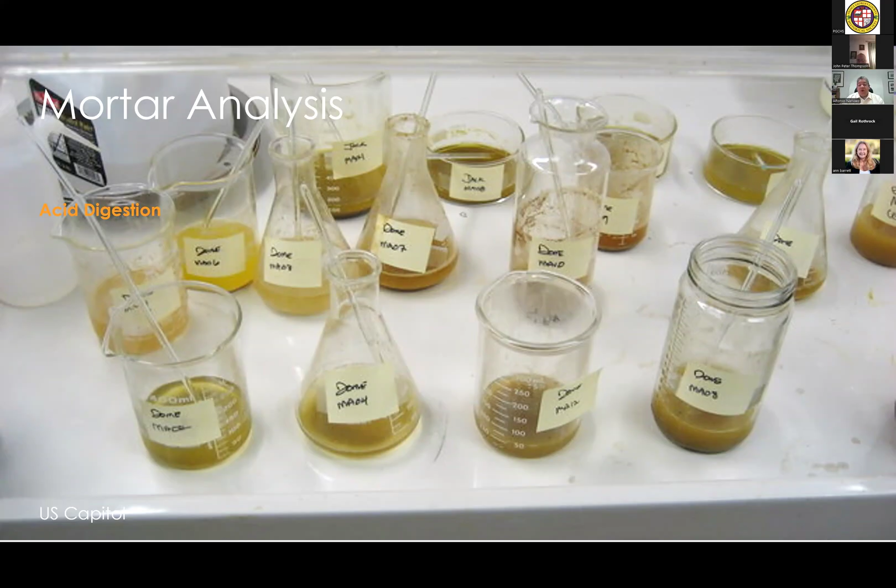We might go into more advanced analysis, which I wouldn't do in-house, I'll use a third party for that. That might include petrographic analysis, which helps me understand what the minerals and other constituents are in the mortar.

Alfonso, I promised I wasn't going to interrupt you. Why is it important to know the constituent parts of mortar, for example?

One of the fundamental things we're looking for is how do we match the existing mortar, both in appearance but also in its physical properties. We want to make sure the mortar, which is intended to be a sacrificial element, is softer and weaker than the masonry it's holding together. It's not important for the mortar to have enormous strength, it's important for it to do the job of holding the masonry units, whether brick or stone, together, and to prevent moisture from penetrating the joints between those blocks. But it's the masonry that's doing the work, the mortar is really there to tie it all together.

Over time, as we make lots of incremental repairs, we end up usually with a patchwork of different mortars from different generations. So part of what we try to do is find what's the original mortar, and can I afford to bring that back and make a consistent, uniform appearance. But the bottom line is it still has to work, it still has to keep the water out and keep the stones and bricks in position.

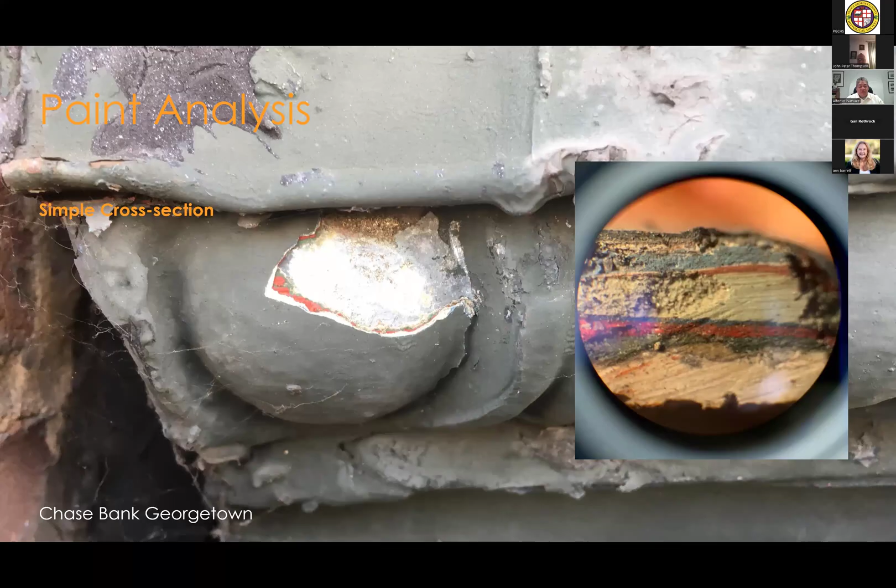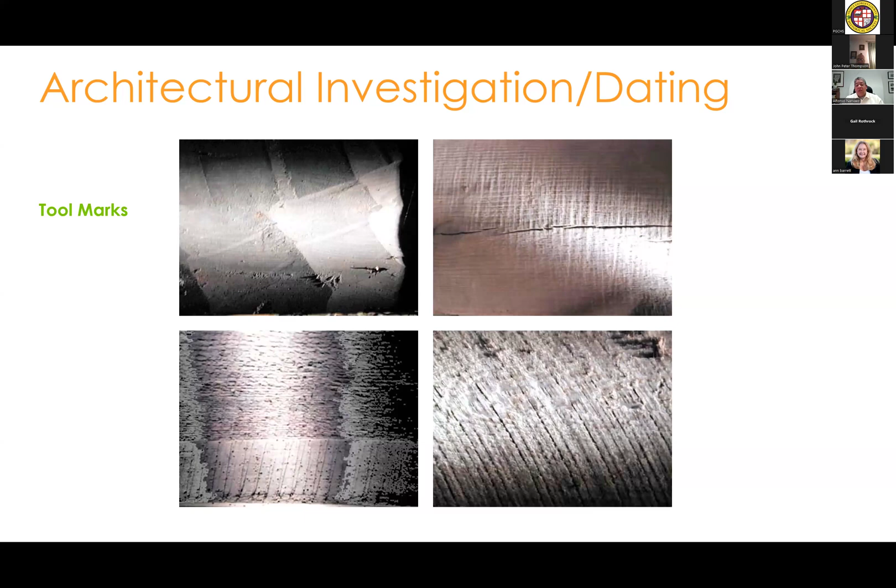When we get into treatment, I will often take samples of all the different materials and try to do test panels, saying okay, I'm going to use product X for a certain amount of time at a certain concentration, and then rinse it off. I'll follow the manufacturer's instructions as closely as I can, and then ask how well it will do if I cut it in half and make it much more dilute. Do I get the same amount of cleaning? Because what I want to do is the most gentle approach that still accomplishes my objective without over-cleaning. So we do a lot of testing of various procedures and materials in place, so we can write our specification with the most information possible.

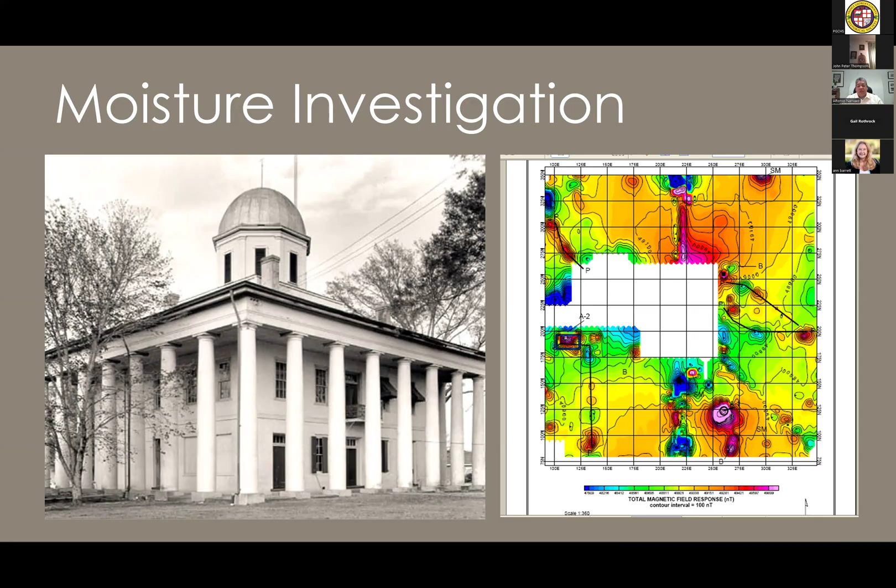On the right-hand side, we're looking at the ground around this particular courthouse to look for any kind of anomalies or water sources that might be penetrating the interior. We might use an electronic moisture meter that we're running up and down to figure out where is the changeover from wet to dry. And in this case, it's about 14 feet up the wall, which is exceedingly unusual.

So we try to figure out why. What's the underlying issue, and why is it misbehaving? Obviously, since this is an extreme example, something has changed, right? This is not the way a building normally responds. What has changed is that somewhere along the line, they put a Portland cement plaster on the outside and a Portland cement plaster on the inside. That's trapped all the water inside this 1840 brickwork, and it has nowhere to go. It's still looking for a place to evaporate, so it's just going to keep climbing up until it finds a place where it can get out. That's what we're trying to figure out, the whys.

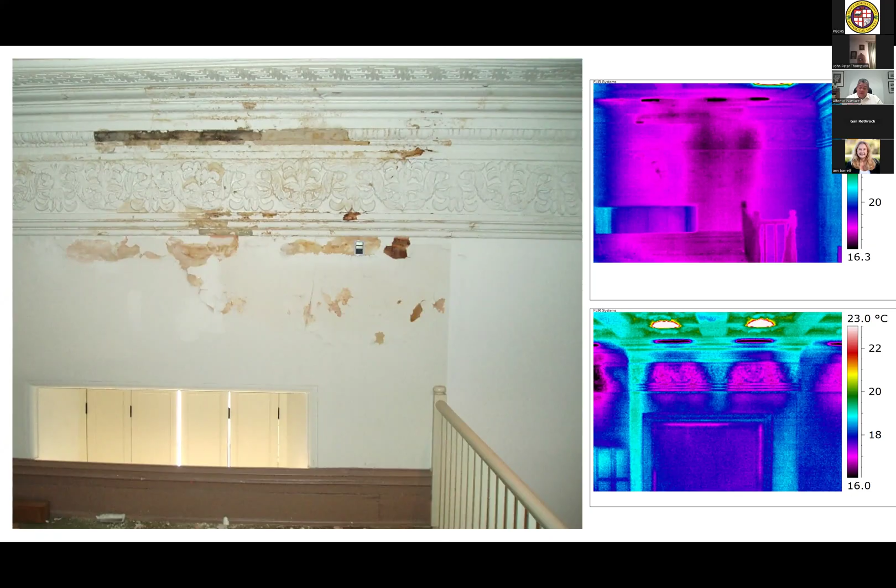Here's another way of looking at moisture. Again, visual clues on the left-hand side. On the right-hand side, we're using thermal imaging, which shows me where the moisture is in the wall as a function of temperature. The reason it shows me that is that a wet wall is denser than a dry wall, so it will gain or release heat energy faster. The dry wall will release it slower, and so I'll start to see a difference between the wet and the dry areas. It just gives me more information to try and understand what's going on and why.

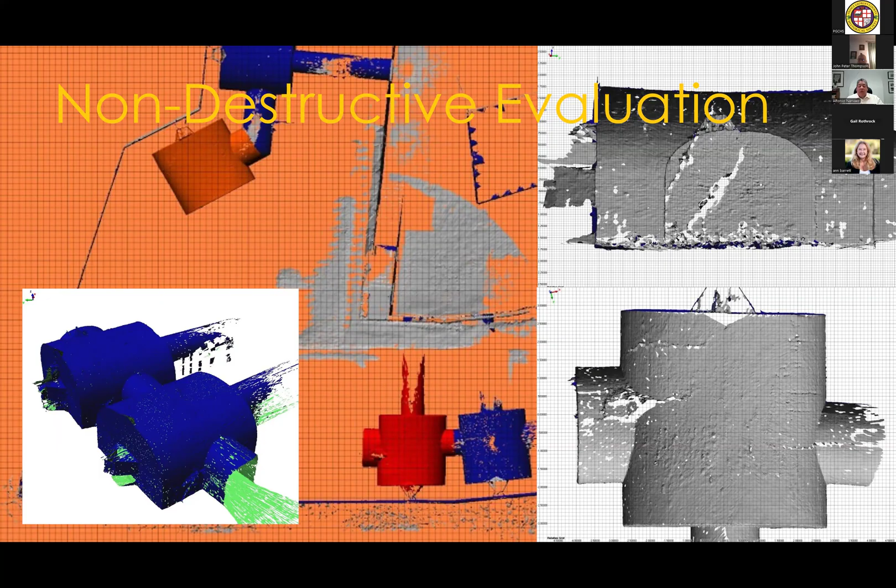Now, three-quarters of the way through our investigation, Hurricane Katrina came through and caused all kinds of damage. So then we got involved in evaluating what the change was from pre-Katrina to post-Katrina, in an effort to try and help Fort Pike navigate FEMA and trying to get money to do some of the reconstruction, but also look at the things that happened to the building over time, and how we could solve that, how we could help save the site and make it once again be open to the public.

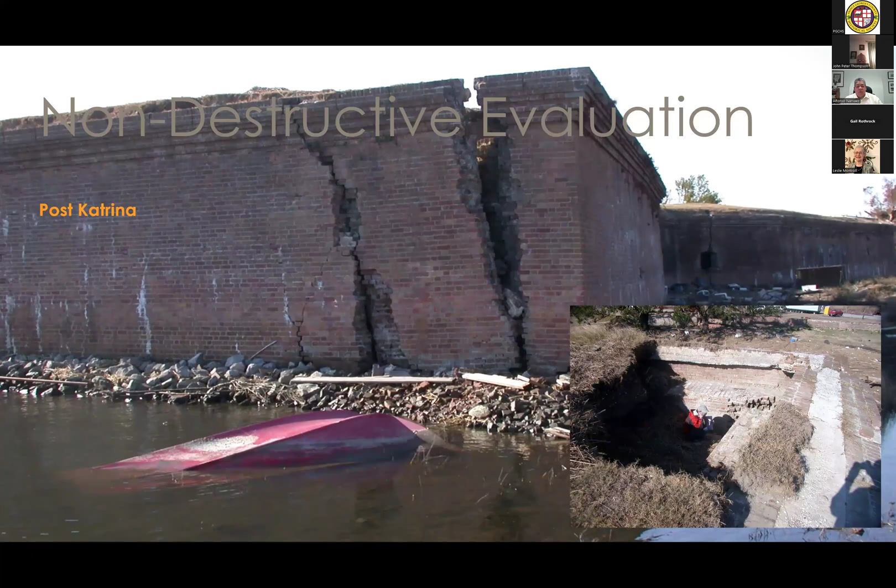This is in Plaquemines Parish. This is Fort Jackson, which also got hit by Hurricane Katrina. I looked at about 4 or 5 historic forts in Louisiana. This is after the waters went over the levee at Fort Jackson. The water stayed pretty much at the top, and it went down to about the halfway level, and then stayed there for 6 weeks. So we ended up with this sort of bathtub ring of salt around the entire fort. And then that salt then started to contribute to damage to the masonry and loss of mortar.

So again, trying to encourage FEMA to do the right thing, but it turns out that FEMA has certain four-letter words that it doesn't like to deal with, one of which is silt, salt, tree, or anything else they can come up with a four-letter word, they won't fund. So we spent years trying to help Fort Jackson recover some of the funds that they needed in order to come back from Hurricane Katrina damage.

Here's my business partner, this is Lane Burrett. Here we're looking at some of the mortar that's washed out of the wall. We're in a boat in the moat going around the outside of the fort and looking at the surface of the masonry, trying to figure out what's going on.

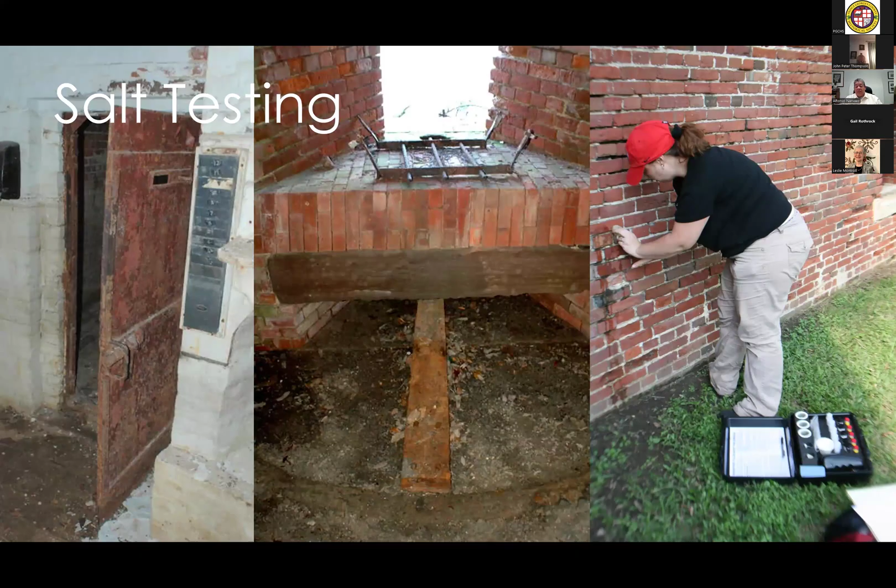The salt also affected everything made of metal inside the building, so we did a comprehensive investigation of every metal feature to look for active chloride corrosion cells that were going to accelerate the loss. A lot of this stuff had surface rust, but it was stable. What happened with Katrina is that it destabilized everything and caused it to rust much more aggressively, resulting in loss of fabric. Rust, though, is also a four-letter word.

The other area we get involved in is architectural support. This is where we might be working with or for an architecture firm, and we will do investigations, often test panels and things like that, which lead to a full-blown project. Sometimes we manage that project exclusively within the conservation group, or sometimes we work with architects and the architectural team to execute the larger project, depending on the scope.

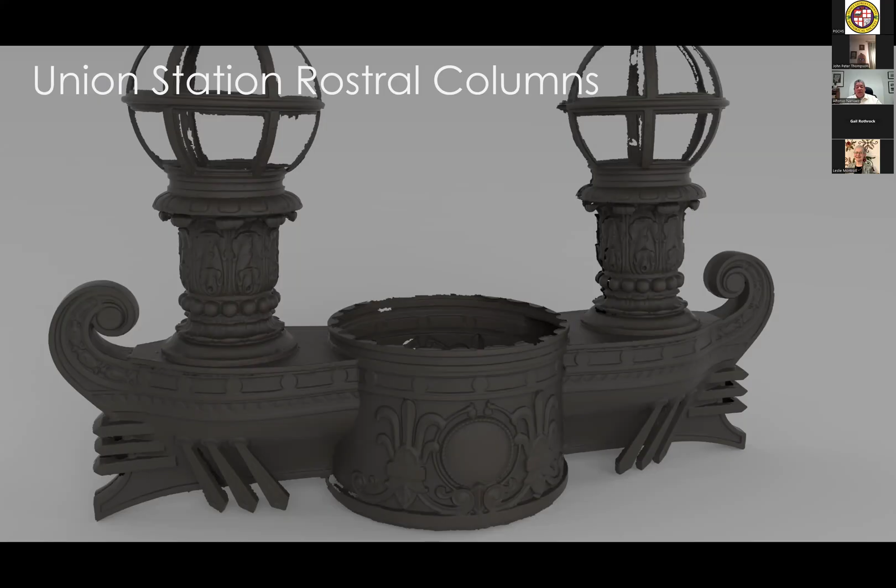More recently, when we started Eon, we wanted to focus on the construction trades and the contractor. That's because that's where preservation, we could have all the beautiful plans and notions and ideas at the front end, but it can all fall to pieces when the contractor gets involved. So we tried very hard to say, how do I support the contractor in their endeavors so that they can navigate between the architect and the contractor and the owner?

I call that little area between the architect and the contractor the Bermuda Triangle, and that's where all projects die, in that little triangle. That's where change orders come. That's where risk is. That's where there's so many unknowns. So we try to own that triangle as much as possible. We call it bridging the gap.

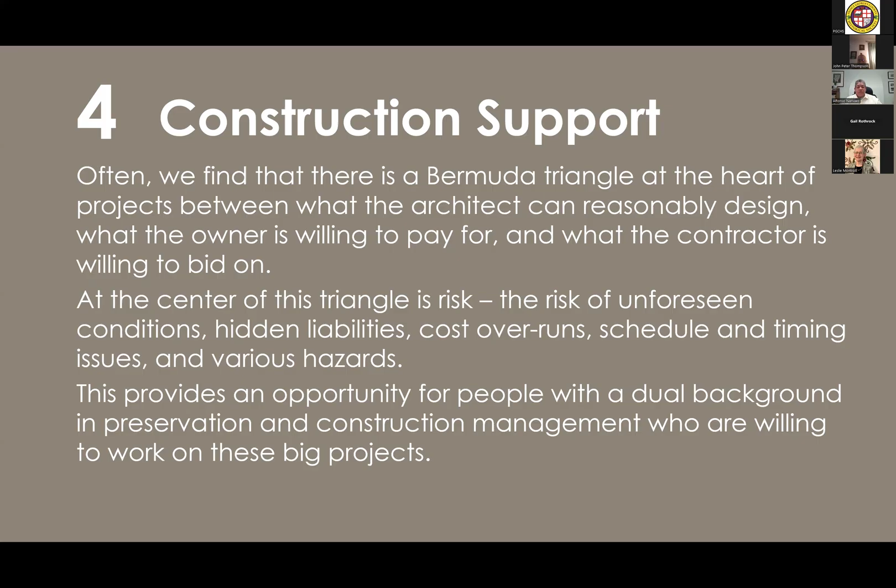So what we ended up doing was a lot of projects where we were brought in by the contractor, both to help them understand the project, but also to navigate. Because we speak owner and we speak architect and we speak contractor, we often serve that role of translating what's possible, and also translating what the construction documents actually say versus what the contractor is actually supposed to do.

So we end up, on occasion, hired by both sides, which is a very unusual situation to be put into. For that reason, I always tell everybody that hires us that for all intents and purposes, we consider the building to be my client, as opposed to you, the contractor, or you, the owner. Everybody here is just a temporary blip in the lifetime of this building. So we're going to try and do what's best for the building.

In this case, this is the Miami Freedom Tower. This is owned by Miami-Dade College. It was built as the Miami News Building back in 1925.

And the contractor was given a set of construction documents that basically had a big cloud around the tower, with instructions that the contractor was to hire a conservator to survey the complete outside once access was available, and to determine the scope and to do that scope within the time and budget allotted, which of course is called kicking the can down the road.

So the contractor did a search, we came to an understanding, and flew down to Miami. Then we did a very comprehensive but rapid investigation of the building envelope via swing stage, via fixed scaffolding, via man lift, and via crane bucket. So you can't be afraid of heights. Another requirement.

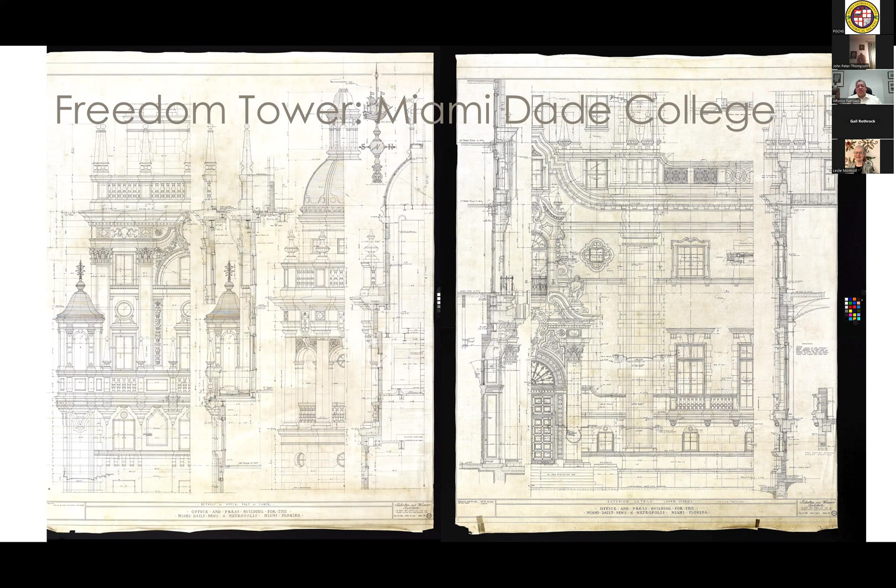These drawings are hard to get a sense of scale, but they're about 4 feet wide and 5 feet tall on 2 sheets. It maps out every piece of ornament on the facade of the building and its attachments. For me, this is gold—this is my roadmap for all of the different issues I am going to find on this building.

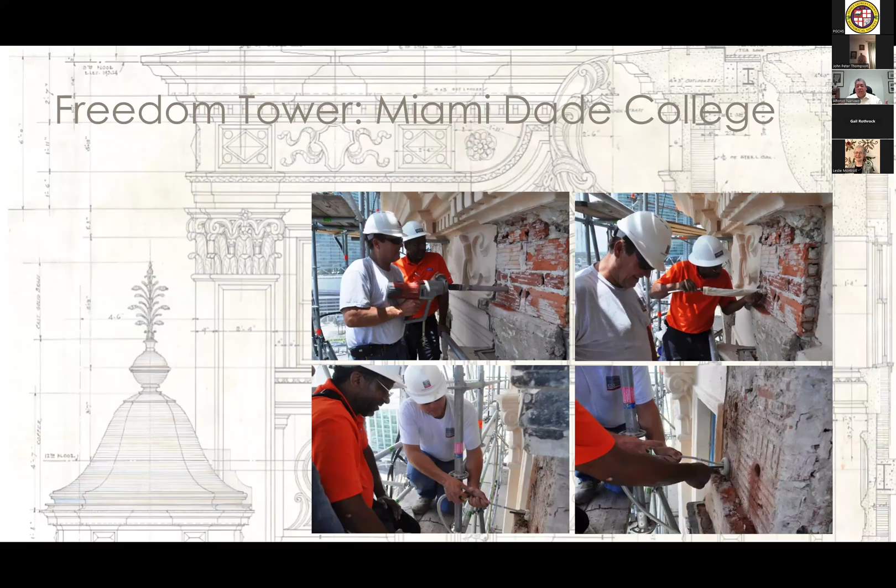We also helped train them in techniques that are not common in the Miami trade, in the contracting community. Here we're using what's called a Cintec anchor, and we brought down the manufacturer to train the contractor on how to use this very specialized anchor to tie the wall together. I won't go into a lot of detail, but that's the kind of thing we might get involved in.

But again, we're in the business of translation. Here's some of the detailed areas—we ended up mapping out a tremendous amount of work on this particular building. That was one of the ways we did quality control, to make sure things were being done properly and staying on top of all the various issues. We flew down once a week to assist the contractor, and for all intents and purposes the architects, the building owner, and the contractor were all happy with that arrangement.

This was another project we were involved in—the U.S. Capitol Dome renovation, from a few years ago. Here our role was we wore several different hats. One was to communicate to all of the subcontractors the importance of this site and of historic preservation, and the limitations they might encounter, such as not being able to introduce moisture or outside air into the interior. We have this incredible array of artwork on the inside, from the apotheosis at the very top, to the frieze at the midway point, to sculptures down at the ground level. Part of that was to communicate to the contractors what the dealio was.

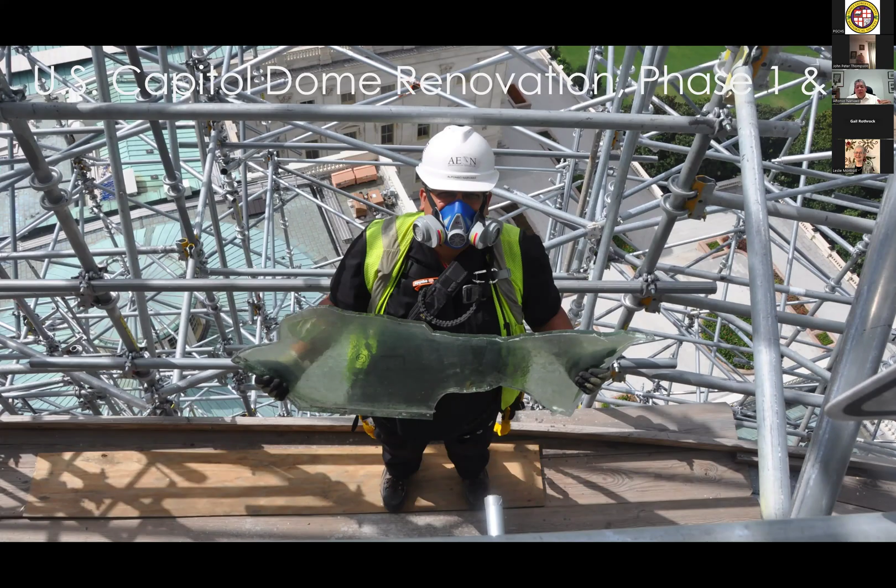Then we worked with a company in Oregon to cast new sheets of glass. They do all kinds of fancy high-end glass, and they created a custom steel platen—the table it's coming out on—which was preheated to 500 degrees. The molten glass was heated in a big kiln and chemically made to be as close to the original glass as possible.

They would take giant ladles, and carefully, because it's 2,000 degrees, bring that ladle of glass over as fast as possible and pour it into this machine, which is like a big pasta roller. Where that 2,000-degree glass hit the 500-degree temperature, it developed a series of chill marks, which you can see in the glass surface.

Those chill marks are very similar to the ones we had in the historic glass. But we made the new glass half as thick so that we could take two pieces and laminate them together, creating laminated glass that was as close as possible to the visual appearance of the historic glass, but is now essentially safety glass.

That was installed over the stairway that the tourists run. They waited too long to do the project, so we only installed 7 or 8 pieces of glass, and they have another 10 pieces in storage waiting to be installed at some point in the future when they decide to re-scaffold the Capitol Dome.

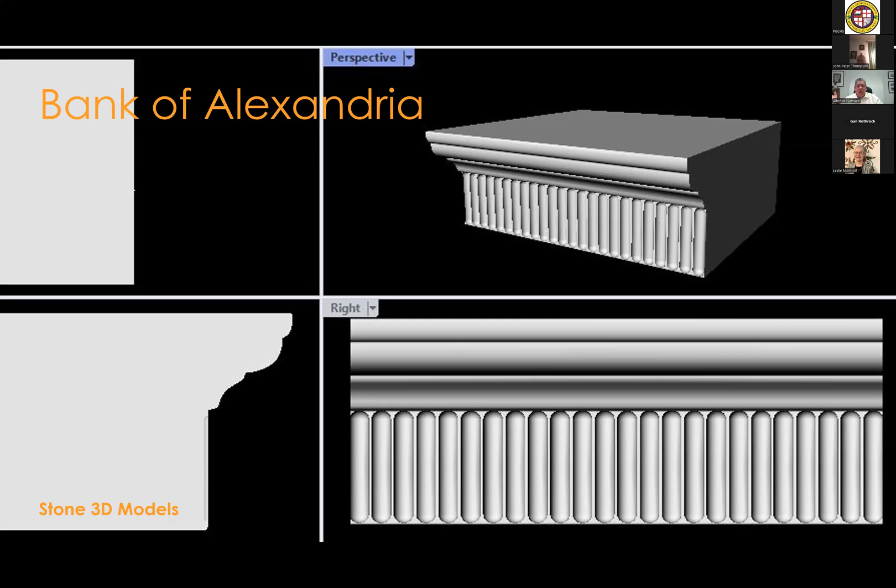That computer model was then used to create new stone models—3D models for each and every piece—which allowed us to work with a stone cutting company in Indiana to make new stone elements. On the right here, you see restored, reconstructed, fabricated new.

This is... forget the name of the stone. Anyway, it's new limestone that has the same color but doesn't have the unfortunate property of dissolving in water. So that whole cornice section was replaced.

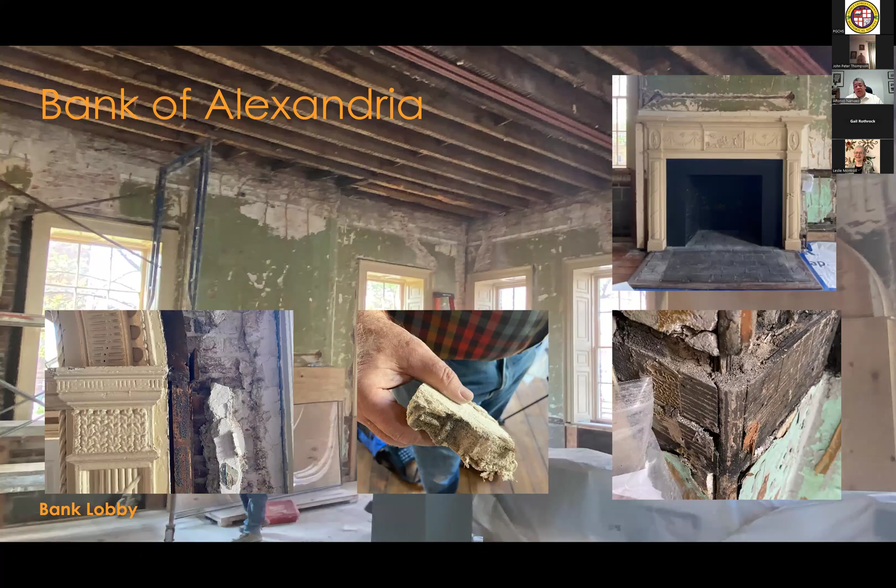We also got involved in evaluating the original banking hall. There we took away all the modern construction to expose as many of the original features as possible, and worked with a whole team of historic architects, conservators, and specialists evaluating all the physical evidence of how that banking hall appeared historically, including evaluating each of the mantelpieces and carefully removing paint to expose areas where we were missing compo ornament or where we had different colors. That's another type of project we might get involved in.

And then finally, we're involved in what we call technical preservation services, which is, for all intents and purposes, design-build work on projects. That means we can be a full service firm, starting from the first investigation all the way through implementation. So here we were contacted about...

This is a sculpture on the White House grounds of William Tecumseh Sherman. In the course of doing the work, a contractor said the surface has turned yellow, we don't know what to do. Just on the phone I said, you probably have a coating on the surface. They said no, there's no coating. I said, yes, there's a coating.

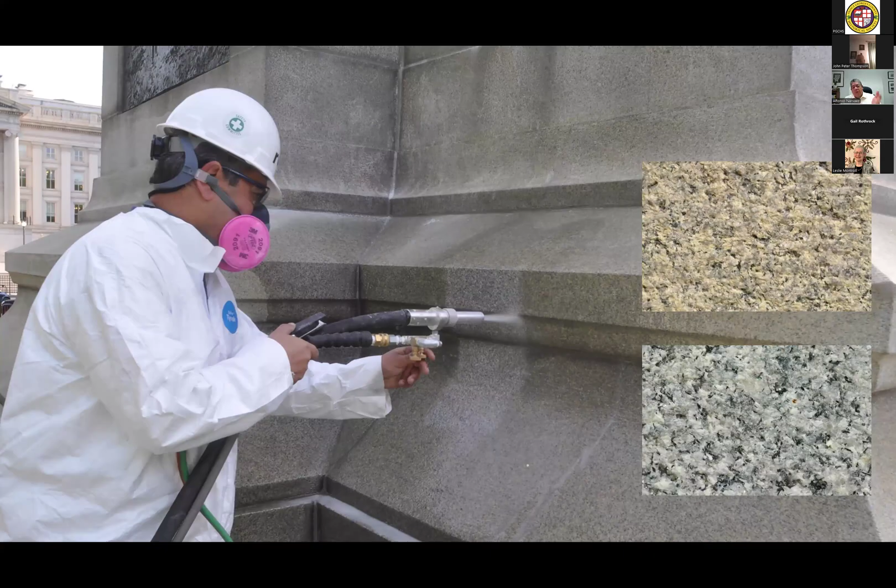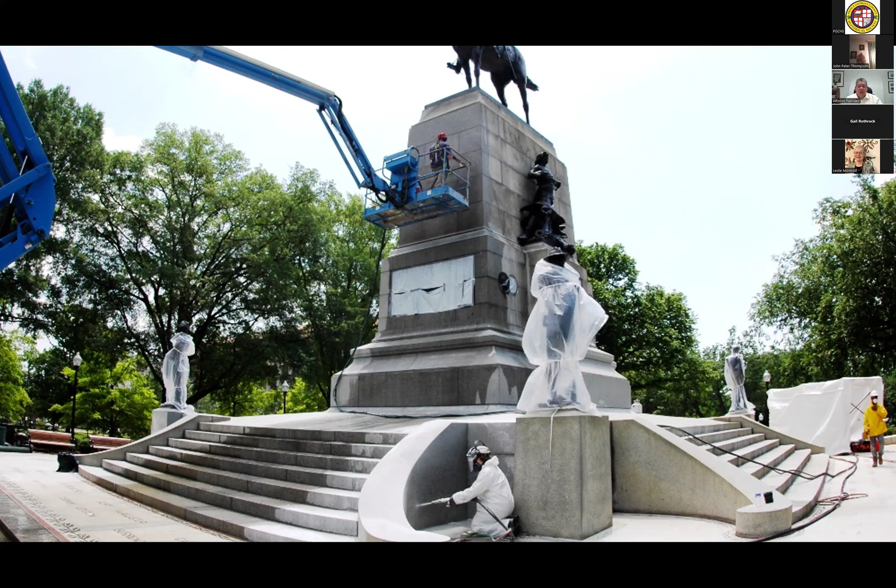So we went out there and helped remove the coating using a microabrasive technique, using the Joss Rotec system, which uses microfine crushed glass media, like talcum powder when you feel it, and very low pressure—25 psi. That allows the glass, which is stronger than the coating but weaker than the stone, to remove the coating. You can see the before and after between the two sections there. We basically went over the whole thing with that system, cleaned the monument, protecting all the bronze elements, doing some other repairs, and here's the end product—a lot less yellow.

Here's another monument, also at the Naval Academy. This was a project done by a class gift. We had to deal with four different elements: an 1812 wooden figurehead encased in fiberglass on top, a 1920s concrete base, 1920s bronze plaques, and 1797-era cannon—actually merchant cannon, not from the HMS Macedonian, but the right size, so that's what they used—that have active corrosion going on. So we had all these disparate elements. Our mission was to take it all apart, restore all the different elements, and put it all back together again.

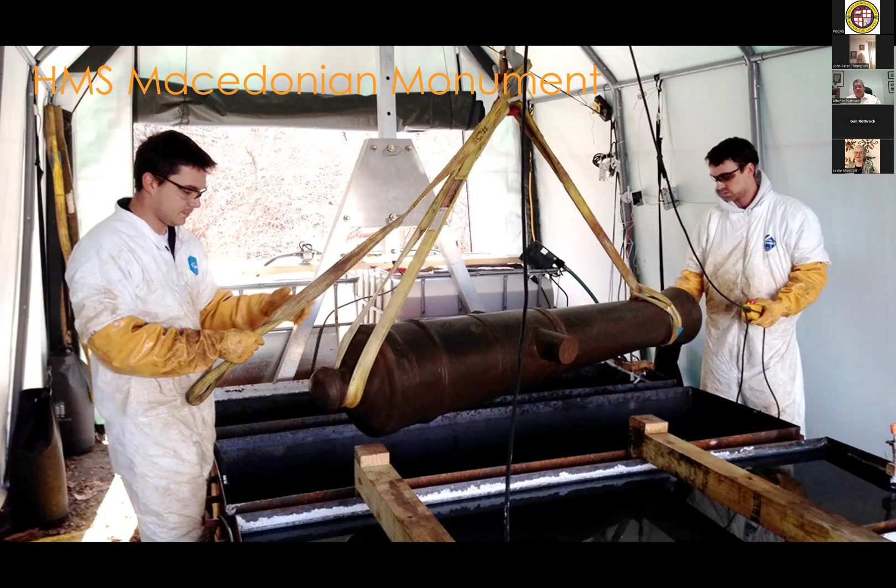And then they were put into a bath, which allowed me to do a chemical chloride extraction from the metal. This took about 3 months of being in a bath, and we had to monitor the water and change out the water and the chemicals to encourage the chloride cells to be evacuated. You can see the outlines of the cannons and the bubbles on the surface.

Here we are doing some other treatment. These are for different cannons, not the same cannons. And then everything gets put back together again. So we restored all the concrete, restored the bronze plaques, recreated the figurehead, and restored the cannons and put it all back together again. And of course, it's about ready for work again now.

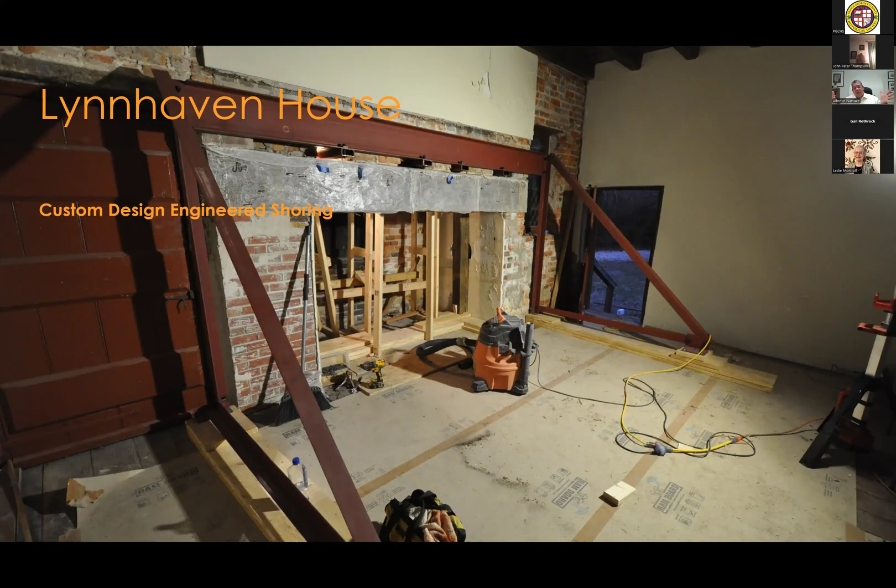So we worked with our engineers and our team to come up with a scheme for how we were going to treat it. So here we brought in a custom-made portable rig to carry the load so we could take out the lintel. The lintel itself has been wrapped in rice paper and a very weak adhesive. And then that allowed us to pull out the lintel.

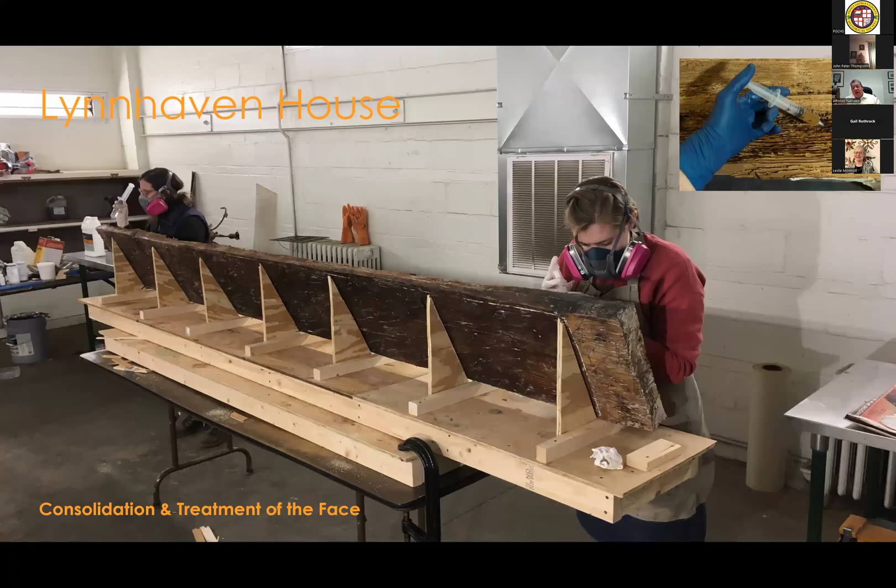The lintel, of course, was very badly damaged, but we wanted to retain the original appearance. So we took it back to the lab - not my lab, somebody else's lab. We cut off the outer 3 inches along the full length and then treated the backside with a resinous material to stabilize the wood. Carved a whole new lintel that was 3 inches shallower, of course, and then attached this face to the new lintel.

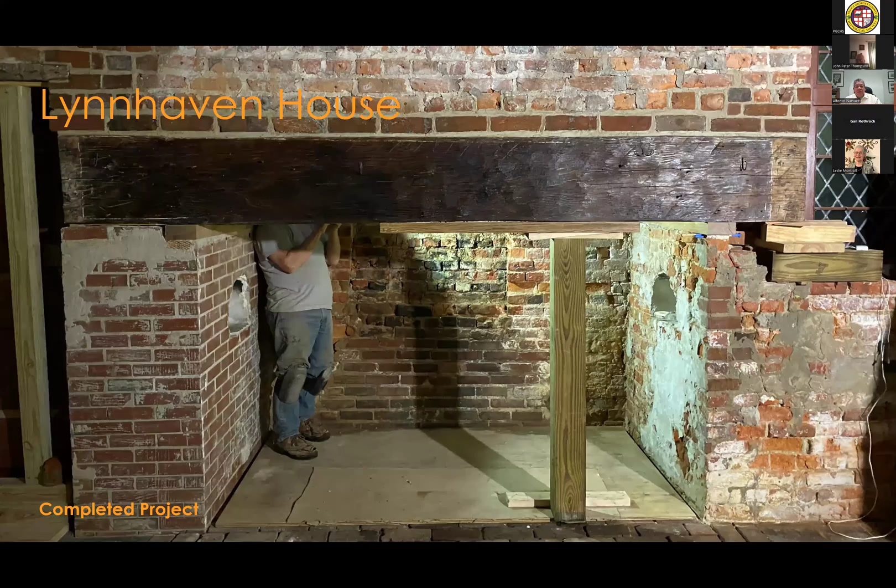And so there's the composite lintel showing the historic face on a new wood backside, and that got installed back in place. So here's the restored lintel put back in position, but with all new wood doing the actual work behind. Of course, we've taken down all the plaster and uncovered all kinds of sins. That's a future project, to restore the masonry.

This is another kind of project. This is the reptile house at the National Zoo. Here, we did a project with an architect to analyze the portico. The portico was showing severe signs of distress in the form of spiral cracks going up near the top of the column capitals and up into the archway and around the pterodactyl.

A spiral crack is very dangerous because it means that we have eccentric loading, right? It's basically trying to wishbone - trying to bend apart, which ultimately means that the arch will collapse. So we said, you know what, this is too dangerous, we can't fix it. It's too fragile, too thin. There's not enough meat here. We have to take the weight off.

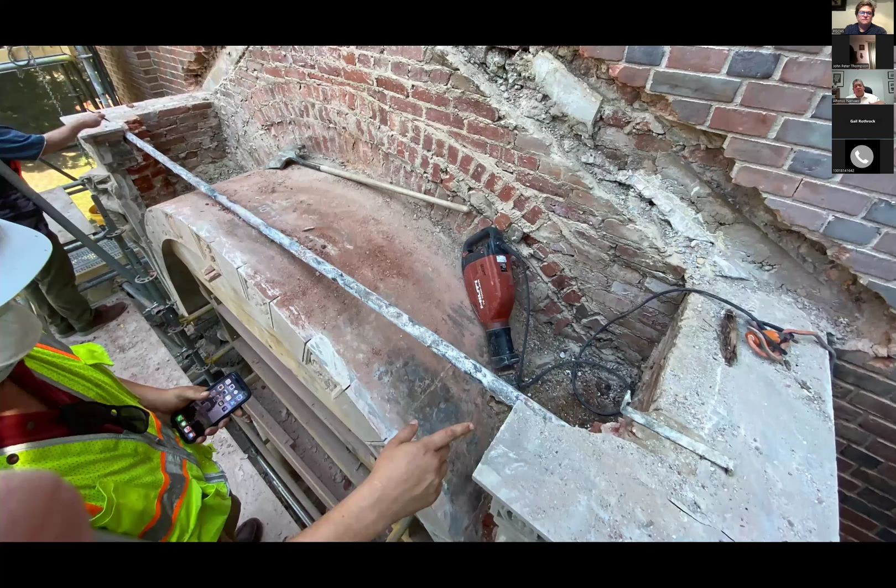And so we encouraged the Smithsonian to do that. Under a separate contract, they hired our firm and our team to dismantle it. So here we are, we've taken off the roof. We've pulled out some of the masonry that was the weight of that. You can see some of the reinforcement on the top here.

Everything was laser scanned, of course, in order to map it all out. Here you can see the reinforcement going across and down behind the pterodactyl. And it's this reinforcement, which is A, too thin, and B, doesn't have enough lateral resistance, that's causing our problem. You can see the crack, part of the crack down here on the right.

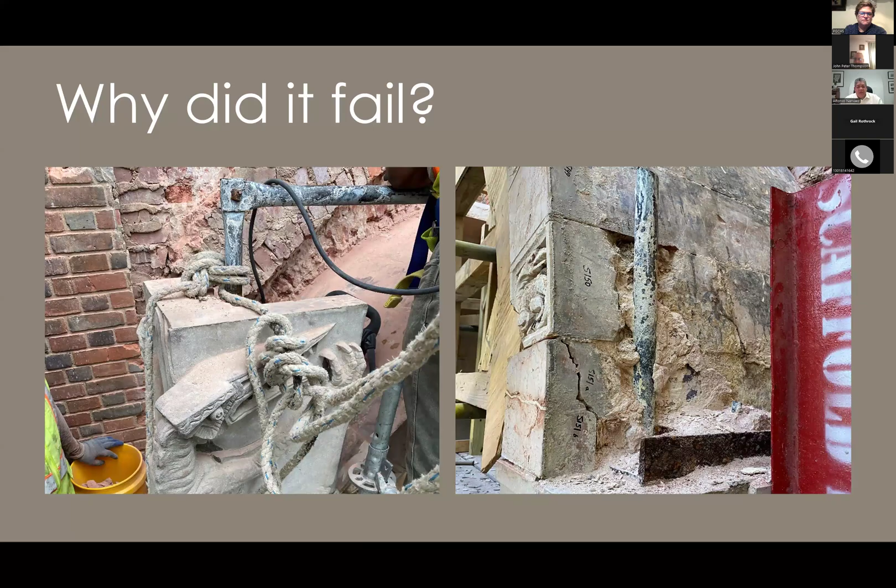Eventually, hopefully, we'll get to put it all back together again on a different kind of support, so it can be A, weigh less, but also B, be more securely attached and not put so much stress on the columns. So Alfonso, unless this is your last one, I'm going to have to stop you.

Okay, all right, that's fun. What are we doing here? Oh yeah, sure. So this is the Mel Fisher Museum in Key West.

We were confronted with vertical cracking on the corners. They had an HSR, and the HSR referenced something called the American Hydraulic Stone Company. So we researched the American Hydraulic Stone Company and found that they had a patented system for creating two-part concrete cast stone blocks.

You see how the blocks don't even touch each other in the middle of the wall. We found other resources, including this book on concrete. It had a whole chapter on American Hydraulic Stone Company, so clearly it was a thing.

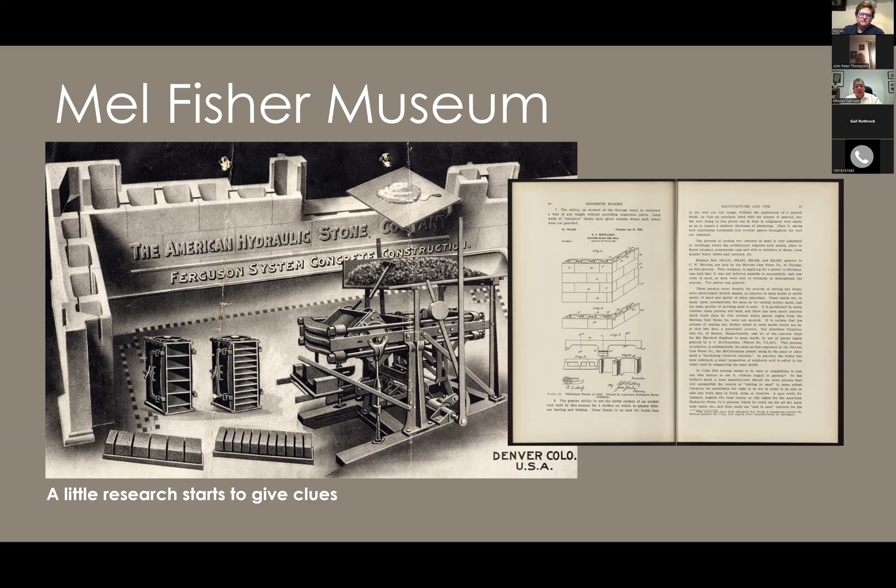We actually were able to climb up in the attic and prove without a doubt that we had American Hydraulic Stone Company walls, because we have the physical evidence there inside the wall.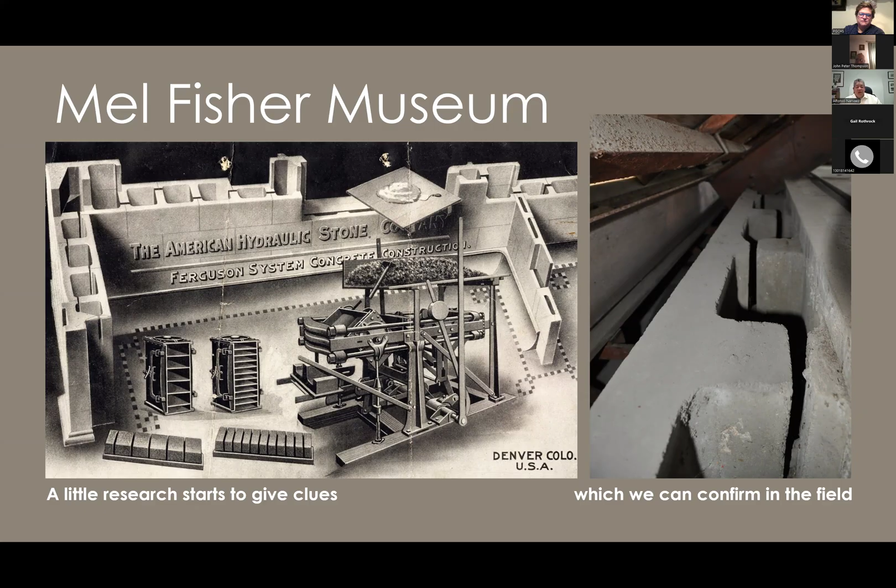When we talked to them—this is before I'd even gone down, other than the one picture on the right—we said, you know, this was a military building originally, so I'm sure the original documents are going to be at the National Archives. Which is not in Key West, but three miles from my office in Suitland. So I drove to Suitland and found the original drawings.

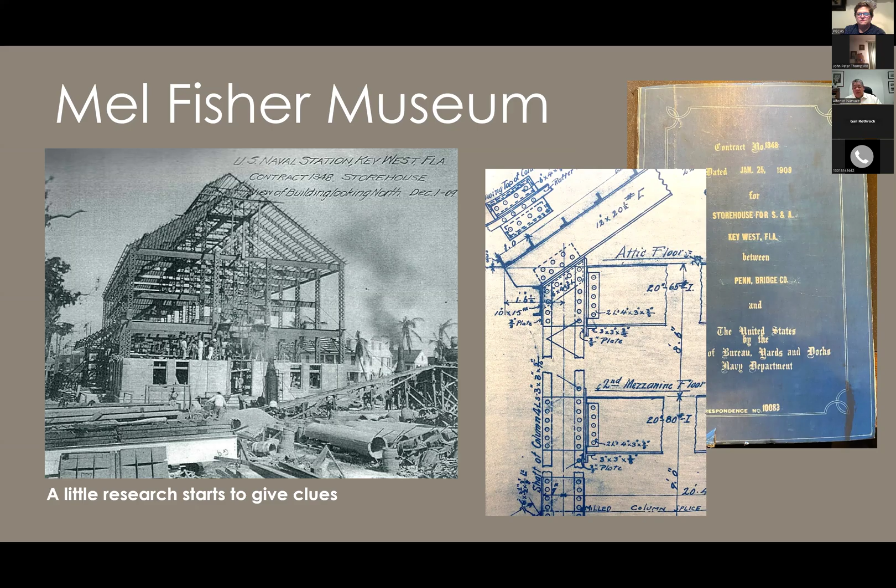So here's the original drawings. We found historic photographs. This proved what we suspected, which is that we have iron framework inside the walls, which are corroding and causing the cracking.

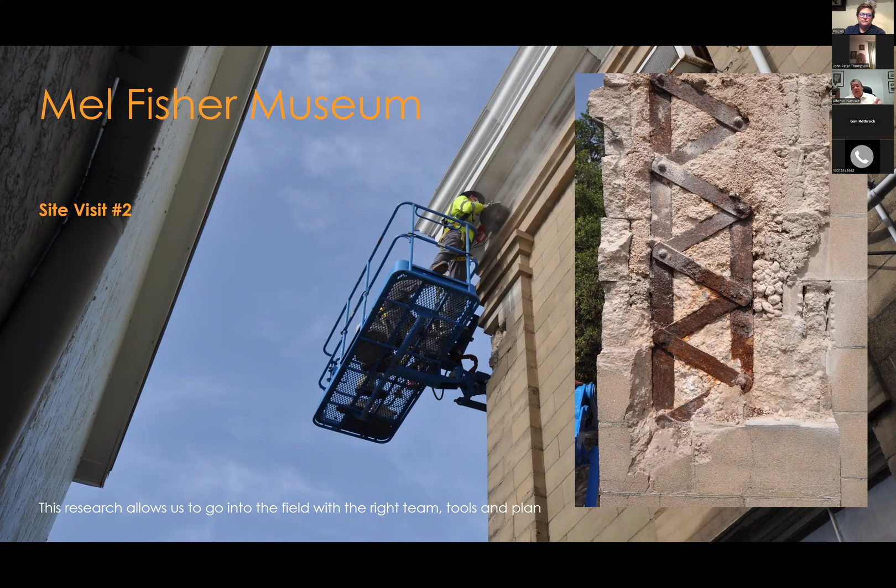So here now we've gone down with our team. We've exposed the corroding lattice columns, which are filled with concrete and failing in varying degrees. We came up with a treatment protocol, and in areas where the lattices were completely destroyed, we welded on new galvanized steel plates to allow the column to still serve its original purpose.

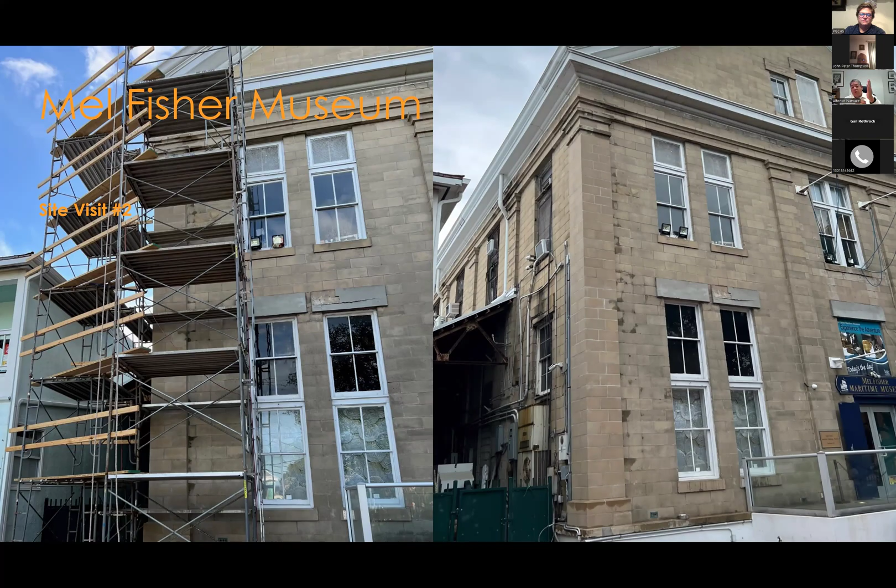Then we worked with our masonry team to cast all new blocks for the columns and the pilasters, because they fell apart when we took them off. And so I've been working our way around the building, restoring the damaged cast stone, and I think we just completed phase 6 and are planning for phase 7.

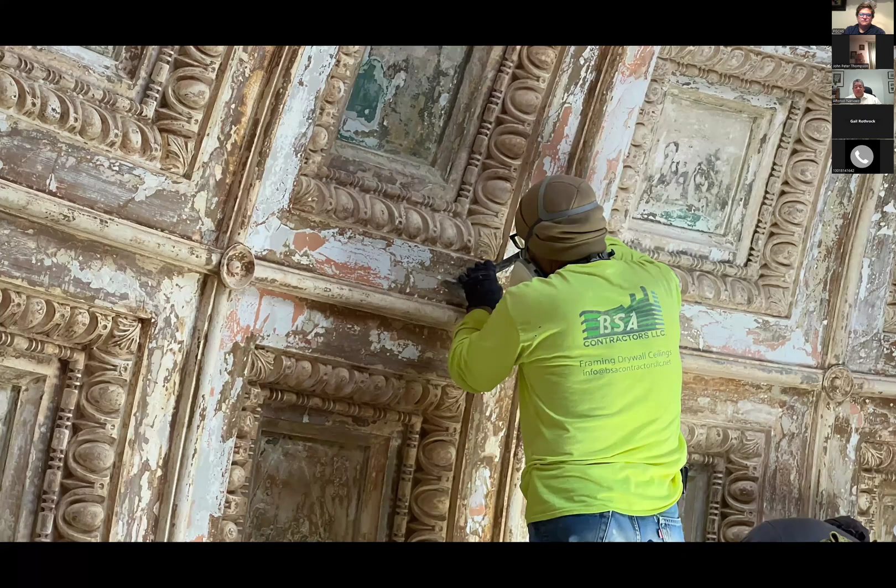Every time they come up with some money, that's what they do. And then there's a handful of slides I'll run through real fast just so you can see the other range of things we do. These are more recent projects.

This is the Eisenhower Executive Office Building. This is restoring a painted dome, which involved plaster repair, paint analysis, removal of all the paint from the surface, and then using the paint analysis to recreate the original paint scheme by the building.

And then more recently, we've been taking down sculptures. We took apart the Downing urn from the Haupt Garden at the Smithsonian and put it into storage. They're getting ready to do a big project there.

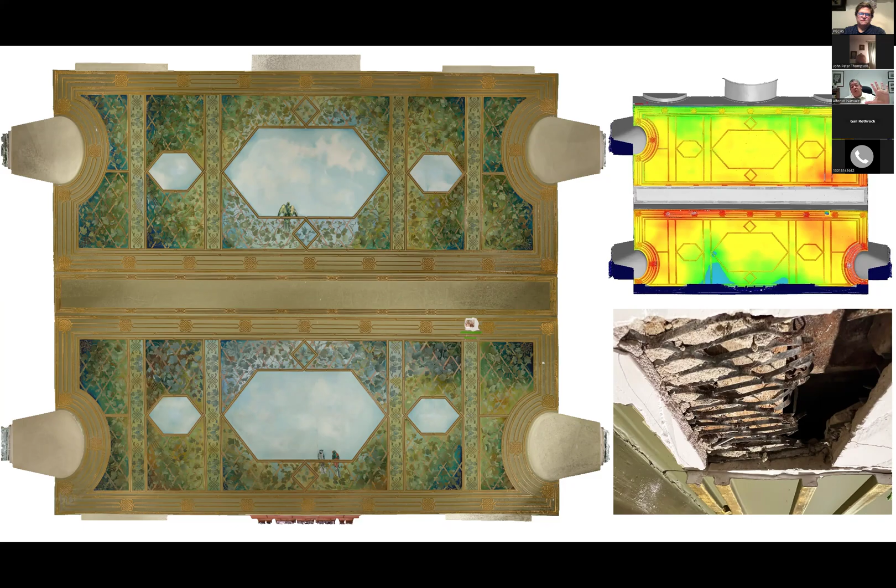We disassembled cases carefully and put them into storage. This is in the children's room in the front, where we determined that the ceiling was very fragile and not well attached. So we developed a whole system of lightweight supports and scaffolding to hold the ceiling in position while they do other construction activities, and installed this whole framework to support it.

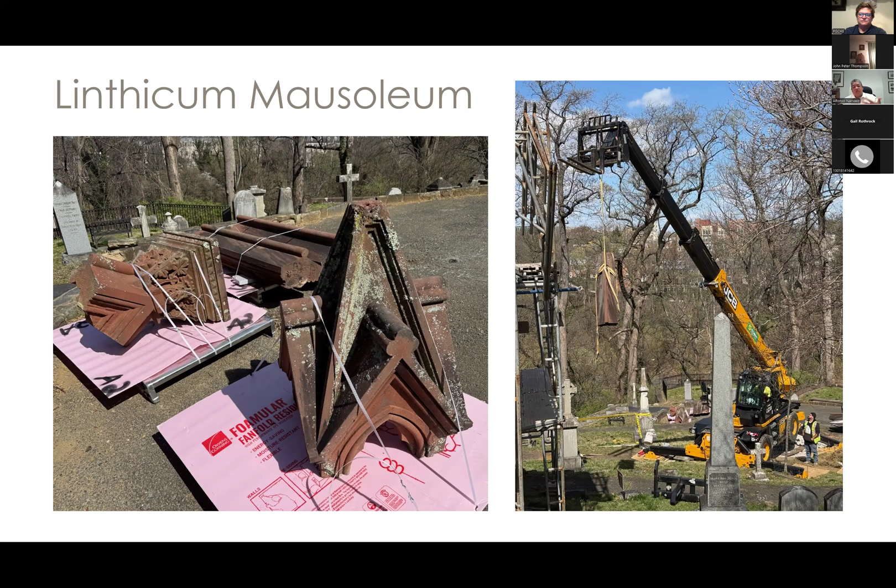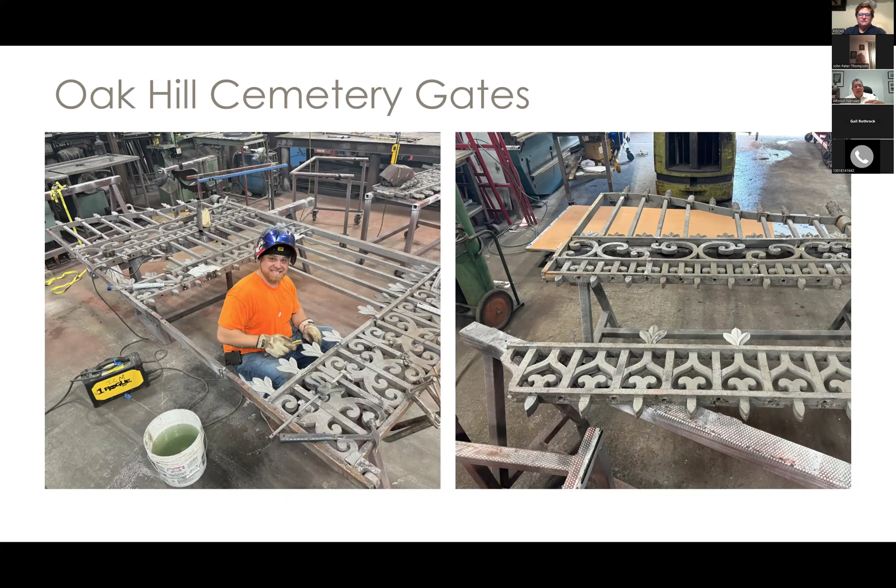While we were doing that, a truck ran through their main gate and destroyed the ornamental iron gate. So we've now salvaged all those pieces, brought them back to our metal shop here in Bladensburg, and are working with them to restore all the lost, missing pieces, and also restored all the masonry piers, so that we can put the gates back in when they're done.

And then lastly, we were told that the Portrait Gallery fence—this is 1865 fencing, all cast iron, cast in one giant panel—had been pulled over by an overly enthusiastic hockey fan and his cousin, and shattered, so about 60 feet of fence is completely damaged. One section completely destroyed has to be recast.

But in the course of that, we did an evaluation of the remaining fence and said, you know, this is all kind of sketchy. So we're in the planning process of getting ready to restore and recreate the missing and damaged sections, but also reinforce the fence in the future. So that's the speed dating version of what we do.

There look like there are 3 or 4 questions in the chat. Let's see what we got here. I'll read them so people can hear them on the video. When you do a paint analysis, can the property owner use that information to get paint from Home Depot, or do they need to go to a specialty shop? So for the most part, it depends on what we're doing.

For the Eisenhower Executive Office Building dome project, that would have been a commercially available paint, but very specialized colors, and we would have done a lot of analysis of the finished paint and its sheen. There are a lot of variables that go into how paint appears, including lighting and the color of your light bulbs. There are just a lot of variables that go into how color is perceived.